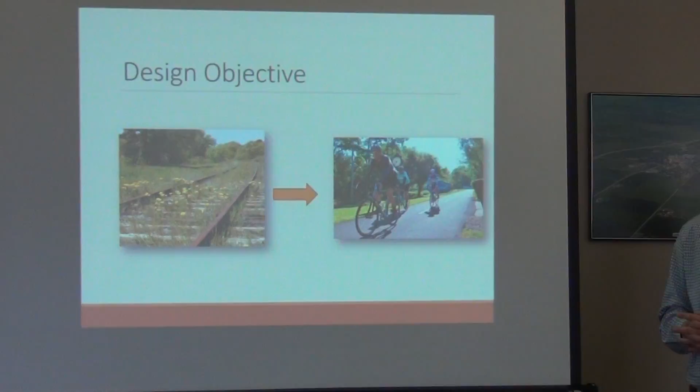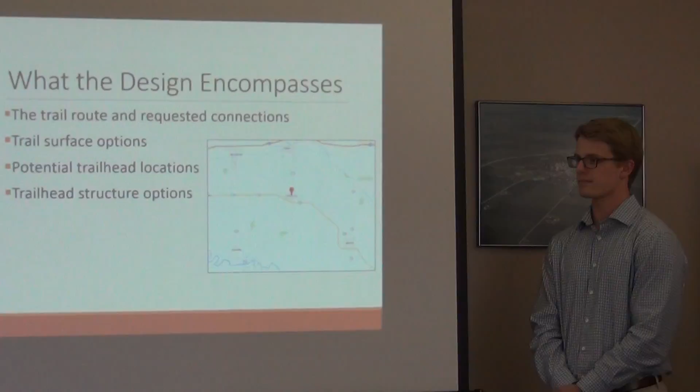Our group called ourselves Capital Consultants, and we are designing the railroad trail project that will be coming through Prairie City. So, like Jeff mentioned, essentially we were tasked with designing a trail that will convert the existing railroad right-of-way, or where the railroad bed was, into a trail that can be used by pedestrians and bicyclists. We're picking it up west of Monroe, following the railroad through Prairie City, where we detour for the grain co-op. So we'll detour bicyclists to the street for a little while, and we'll get back on the railroad and continue up to Mitchellville, where it dead ends at Northeast 116th Street. That was kind of the extent of our project, and the hope is that eventually we can connect into the Des Moines trail system.

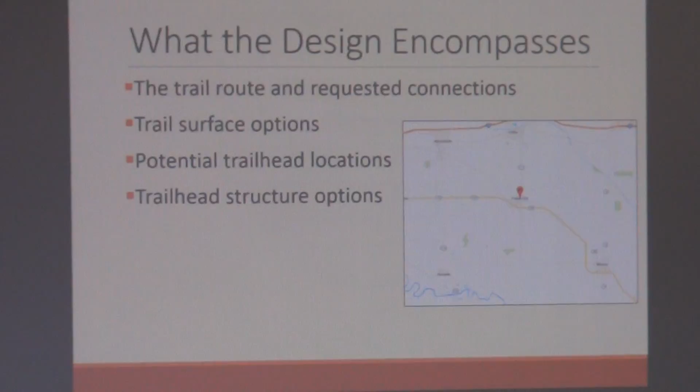An additional part of our design was determining options for a temporary surface and a permanent surface. It was our understanding that it might be difficult to get funds at the beginning of the project to fully fund and get a permanent asphalt or concrete surface. So we examined a temporary surface of a crushed limestone or granular type base that can get the trail open, get people using the trail, and then as funds become available, we can recycle that surface as a base to a permanent concrete or asphalt surface.

Additionally, we designed a trailhead in Prairie City. It was requested that we look at that as an option, kind of a halfway point between the two ends of our trail, as well as it could bring business to Prairie City. An additional component was it was requested that we include connections to the Neal Smith Nature Refuge west of Prairie City, as well as the pond west of Monroe.

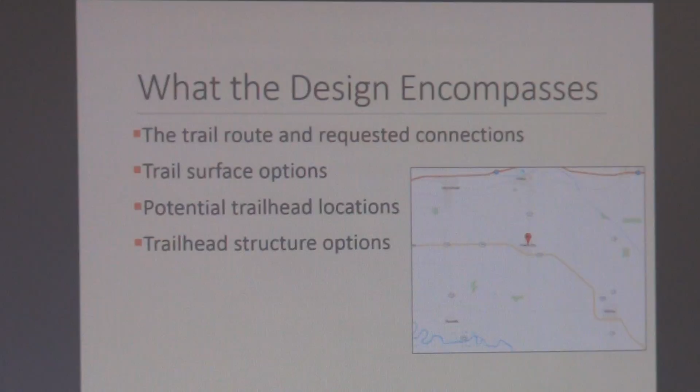So overall, this trail should provide Jasper County with several positive societal impacts. Number one being that it will provide the residents with a new recreation facility, which will allow the residents to enjoy the outdoors and the Iowa scenery. The second is that it will connect the communities, and it should provide better community cohesion between the three towns. It should also create some new business for the downtown of Prairie City, as the trailhead is likely to be placed in the downtown area. There's also some potential to increase the property values of the land surrounding the downtown, as the aesthetics of the downtown Garden Square should be improved.

And also, in the upcoming years, there should be an increase in civic pride for these towns once the trails connect to the Des Moines trails, and once the trail has become established. Hopefully, the residents will see the trail as a symbol of their prospering and unique community.

So we used a number of design standards when approaching this project. When designing the trail alignment and the trail surface, we used primarily SUDAS, or the Statewide Urban Design and Specifications, which is standard across the state of Iowa. In using these standards, it was ensured that we comply with everything that incorporates the Americans with Disabilities Act, so making sure that things are sloped correctly, such that it'll be usable by people in wheelchairs, etc., as well as making sure that drainage is compensated for.

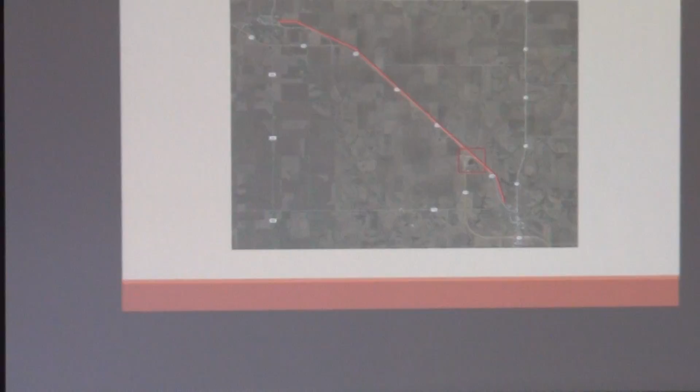So the trail begins on the northwest end of Monroe, and it continues and follows the existing railroad bed until it gets to Marshall Street in Prairie City. And we made sure to cooperate with the Monroe student group in order to make sure that our design for the trail was consistent between the two groups. And we were also tasked with connecting to the pond next to Highway 163.

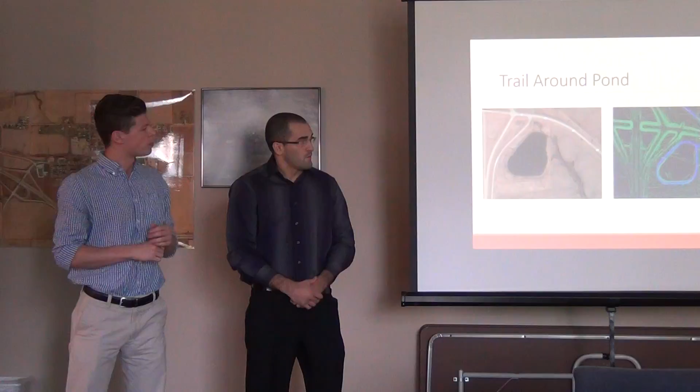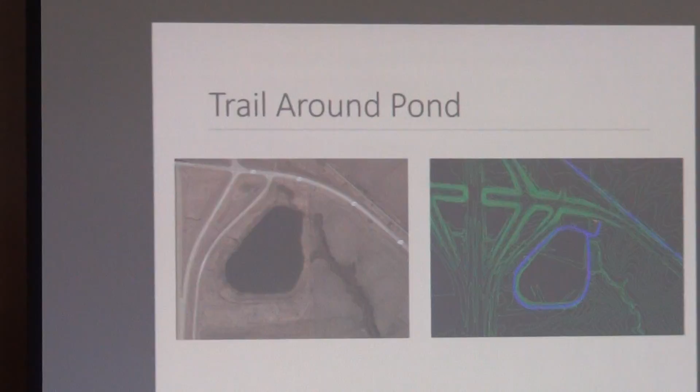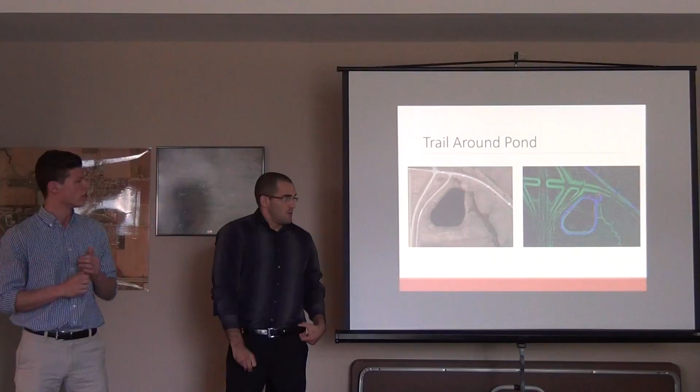And so at this pond, the Jasper County Conservation is looking to implement a pheasant sanctuary, and they're looking to implement a small trail going around the pond. And one of the challenges we had to face was where we were going to connect back to the highway, which would connect us back to the trail. And so we decided against going with the east side of the pond, as that was already existing farmland. And we decided against the west side as the grade was too steep and that would cause unnecessary cut and fill. So we decided to reconnect with the trail through the north end.

The trail through Prairie City, as Michelle mentioned, was to avoid the co-op and offer the maximum exposure to the downtown area. Coming from the east side of the town, it's gonna turn north on Marshall Street, then we'll turn east on Jefferson Street, keep traveling until we turn south on West Street and reconnect with the trail. Then we can see that's gonna avoid the co-op.

We were asked to connect the trail with the Neal Smith Park. This connection is made by getting off of the trail, riding south to the Buffalo Square, where there's an existing facility so the riders can rest. Then they're gonna cross the bridge and connect with the existing trail that's already in the Buffalo Square. We provide sign marks and paint marks on the streets to provide the safest route for the riders. And also, we chose the best route so as not to influence the traffic too much.

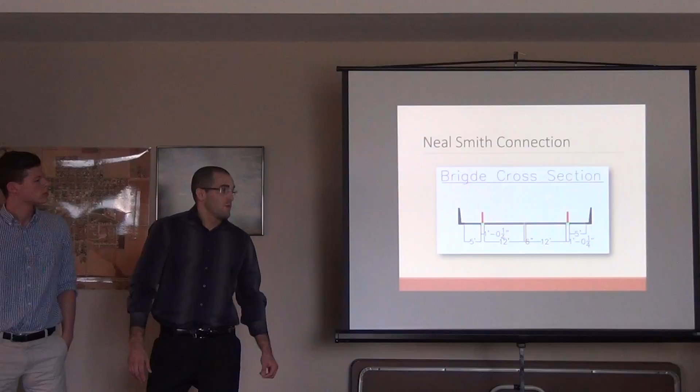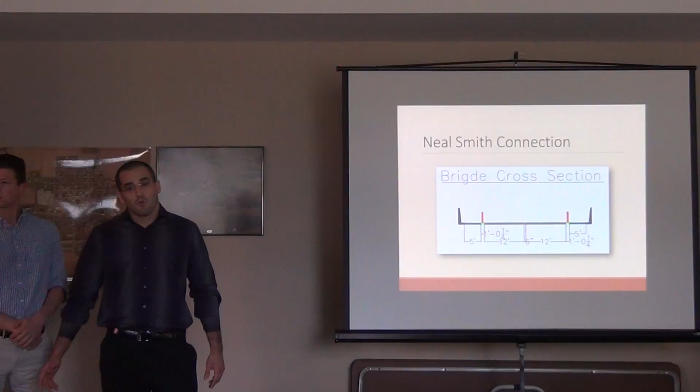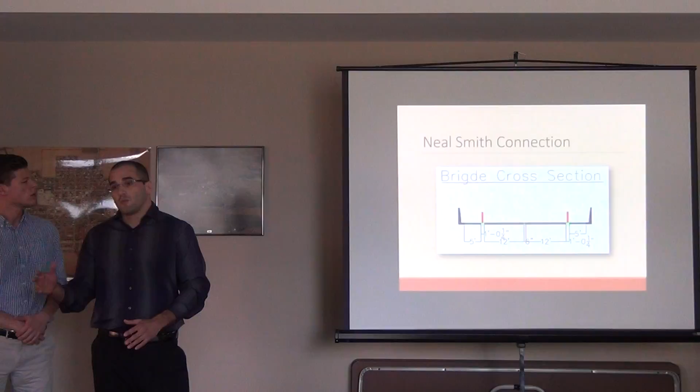To cross the bridge, we developed, by the requirements of SUDAS, 2 lines on each side following the traffic with bollards, which can be flexible or rigid bollards, and they're gonna be spaced a little bit before the bridge and until after the bridge. So we provide the most safety by keeping the bikers away from the cars.

So after we exit Prairie City to the west, we'll continue up the rail alignment until we dead end at Northwest 116th Street, south of Mitchellville, which, as I said, was the extent of our project, but the hope is that eventually that'll connect to the Des Moines trail system.

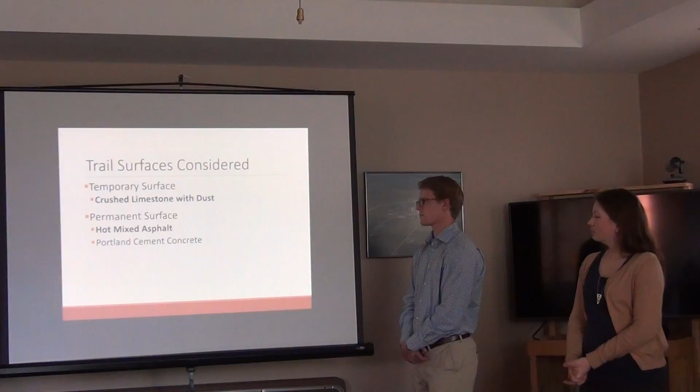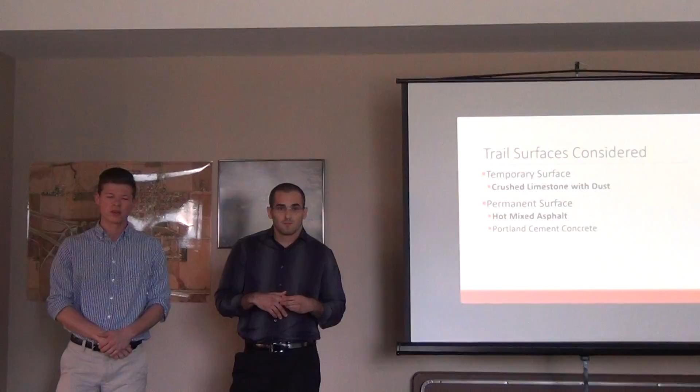So for the trail design, we were asked to create a temporary surface and a permanent surface, as the trail would be constructed in different stages. And so for the temporary surface, we went with crushed limestone with dust, as this was a common surface used in other trails throughout America. And for the permanent surface, we had to choose between hot mix asphalt and Portland cement.

So for the temporary surface, we went with the 1/4 inch limestone with dust. And this was mainly due to the 3/4 inch already being implemented by Monroe, and we were told that some of the riders were complaining that it was too rough of a ride. So this finer aggregate should provide a smoother ride for the temporary surface. And the 4-inch thick layer should provide a suitable sub-base for the permanent surface.

And then for the permanent surface, we have the hot mix asphalt, as this was the cheaper of the two options. And this is going to provide a very smooth ride for the bicyclists, and it will be durable, but it will require some maintenance after the winter due to the freeze and thaw, so it will require some patching. So overall, we have an 8-inch thick trail. It will be 10 feet wide with two lanes, and it will have a 2% cross slope, and this will provide some runoff for the trail.

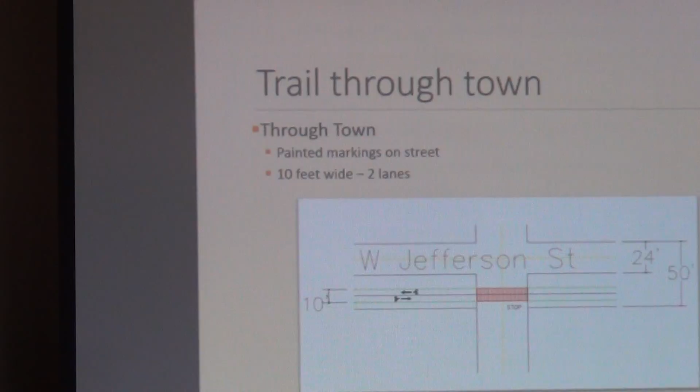Through town, we also follow the requirements of SUDAS about the width of the lanes so as not to affect the size of the streets. We provide 10 feet wide lanes with signs and marks all over the town, so we can provide the safest route for the riders.

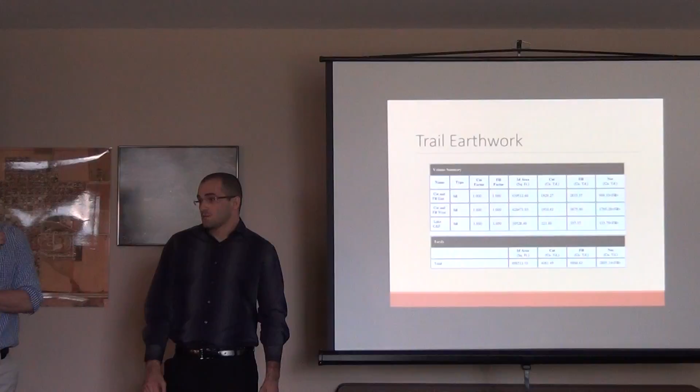So overall, we had 2,800 cubic yards net of earthwork that needed to be done. And considering that the trail is 17 miles long, we figured that this was a very suitable number and very manageable.